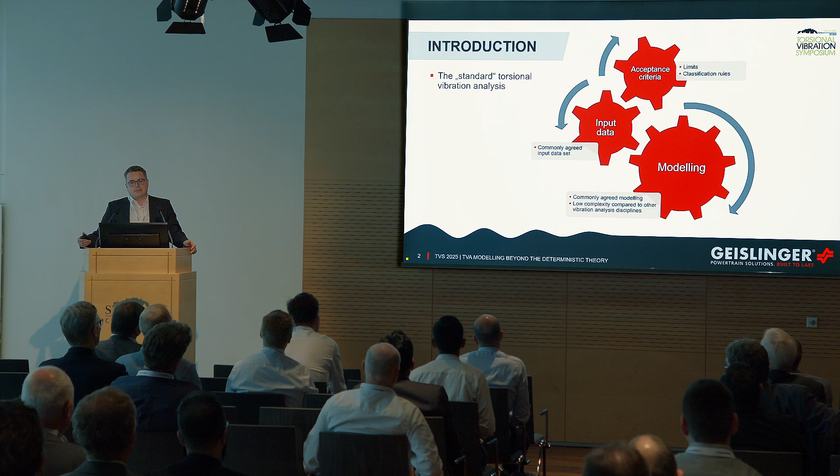symposium. And from my point of view, torsional vibration analysis plays such a crucial role in vibration analysis and vibration engineering, as it has the main pillar of a concrete and commonly agreed modeling that can be verified by measurements. We all are players in this field because we can exchange input data without having fear about IP protection. And there are acceptance criteria. We have clear go and no-go areas.

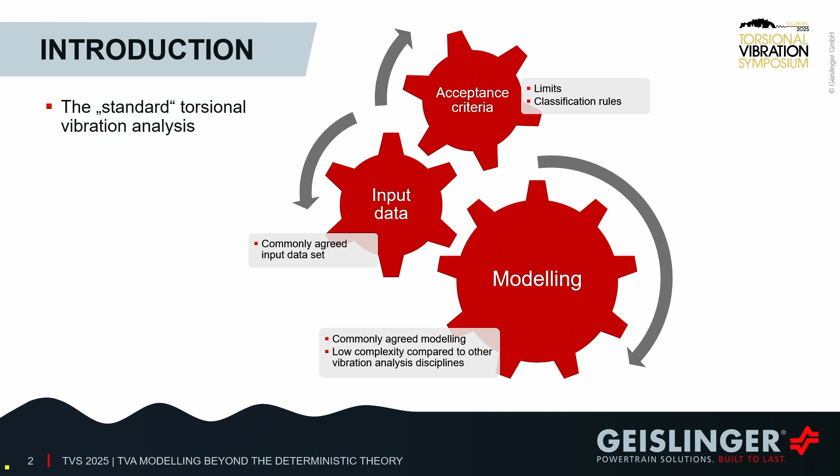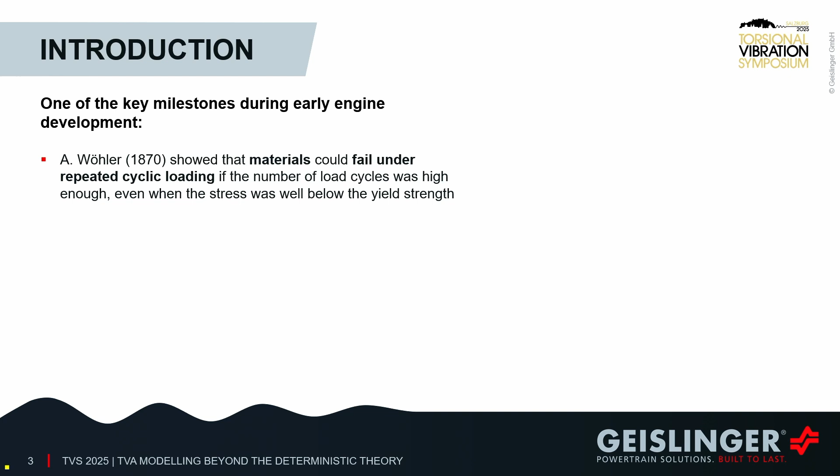And exactly this last one, I want to emphasize a little bit more to give the link to the non-deterministic theory. So talking about acceptance criteria, one of the first key milestones was when it was found out by August Wöhler that materials could fail under repeated cyclic loading. The stress levels were below the yield strength, but the number of cycles was high enough that they failed. And by major contributions from other very famous guys in this field, Miner, Palmgren, Cadwell, Weibull, they developed a theory that allows us today to decide go or no go.

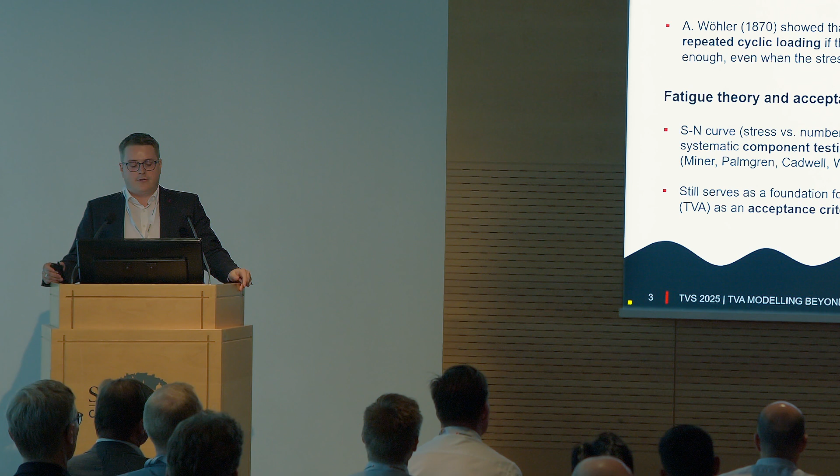And how do they do this? They were doing intensive testing, took the results, did statistical evaluations, and derived acceptance criteria based on this. So whenever we are doing torsional vibration analysis, and whenever we are saying something has to be good enough, we are doing somehow a simplification based on statistics. And this is the way I wanted to go.

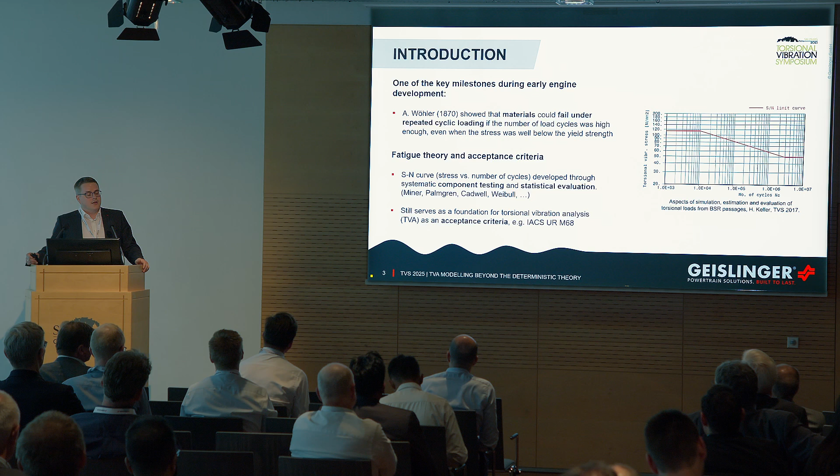But if we stretch this out to non-deterministic behavior, I want to give a definition or a hint of a definition of what I mean with non-deterministic in this entire talk. Everything is called non-deterministic here which is not clearly predictable. And it's always important to have the observer's view. If you are the observer and it appears to you random and unexplained, this is what I mean by non-deterministic.

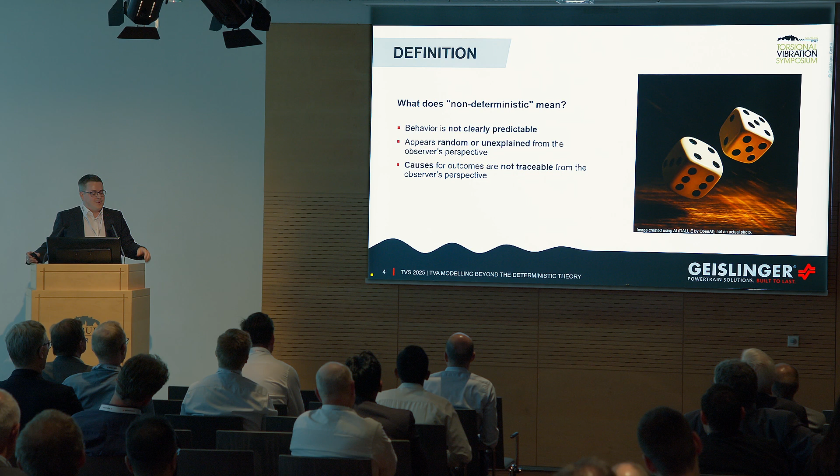And take this picture here; this was generated by AI. I just typed to ChatGPT, please give me a picture of throwing 2 dice, and you start to play with ChatGPT a little bit, and you start to gamble a little bit, and you will definitely lose some money until you notice that these dice are manipulated by ChatGPT. The left one has 2 fives if you want to continue this gamble.

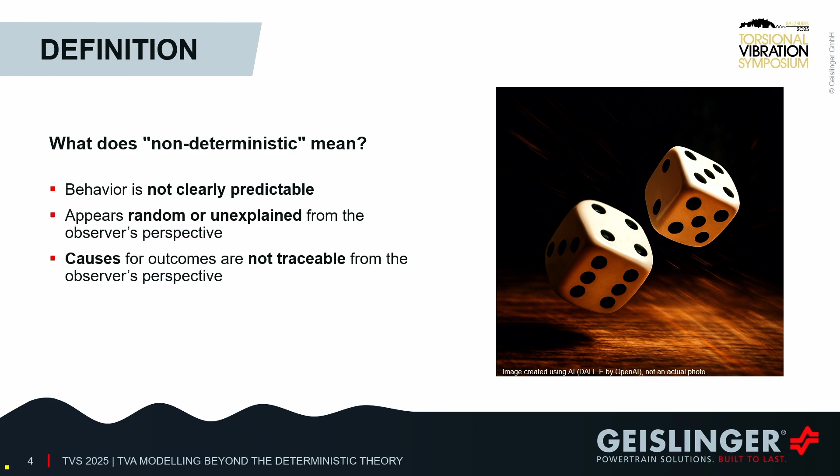So what do we take away from this? First of all, never start to gamble against AI. They're not playing fair. And second, if you don't know the real source, the outcome is surprising, and you need to work a lot to understand it. And this is what I want to show you on different time scales now.

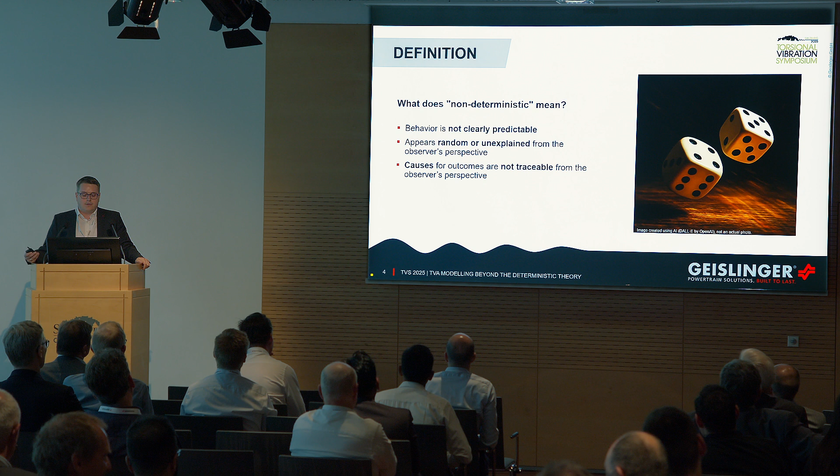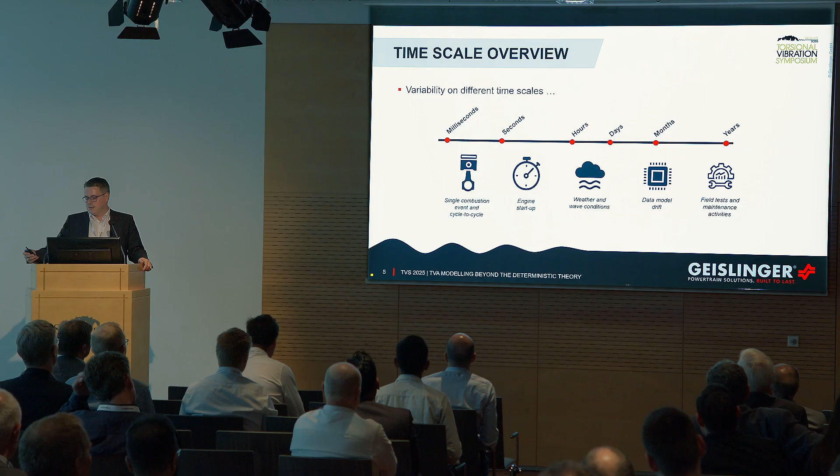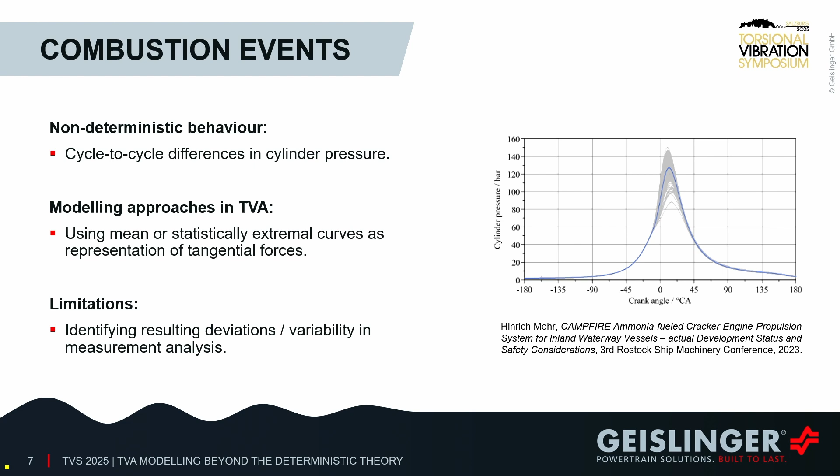We are starting on the shortest time scales, talking about milliseconds, and we're raising the time range up to the lifetime of a powertrain. Of course, we go strictly in order, and we start with the shortest one. I want to show you some results that we had on single combustion events and cycle-to-cycle comparisons during the last years. So what is the non-deterministic behavior behind combustion events? These are the cycle-to-cycle differences.

We have here a picture of a really early stage of the engine development of an ammonia engine. And we see here a clear variation in the peak pressure levels. We have here a blue line, which indicates a design curve, which is an average value. So we have to take all these measurements and make them simple and accessible for the torsional vibration analysis guys. However, how to identify those deviations in real life?

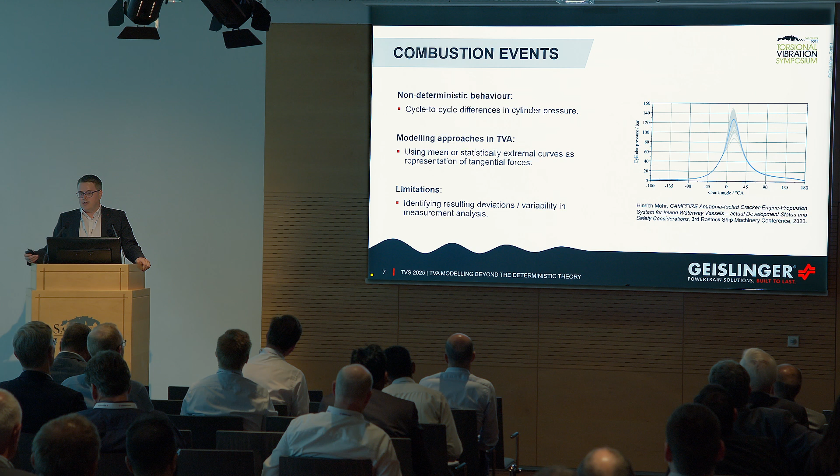And I have brought with me one really interesting example. There was, on a power plant with an 18V engine, a load test for a dual fuel engine. The first time we had operation in diesel mode, and then they switched to gas mode.

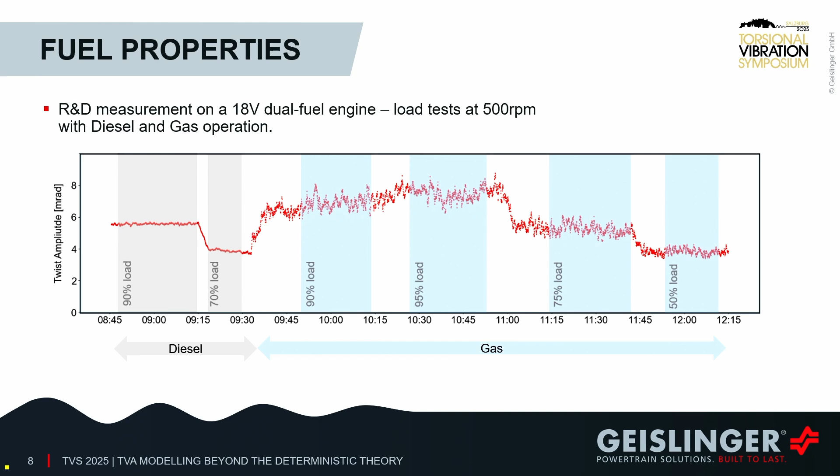And I think if you compare the two pictures, on the left-hand side we have a really stable signal, just small fluctuation. And as soon as we are switching to gas mode, we see huge fluctuation appearing. So the question is how to deal with it. Yesterday we had a very interesting talk asking if this is a storm in the teacup. I want to give another hint.

So if we work with statistics, what we see here, and we compare two load levels, one for diesel and one for gas mode, we typically only see the above picture. And this is what we represent as measurement analysis result typically. So mean values comparison, and we compare this with what the torsional vibration analysis said. But we sometimes neglect the below picture.

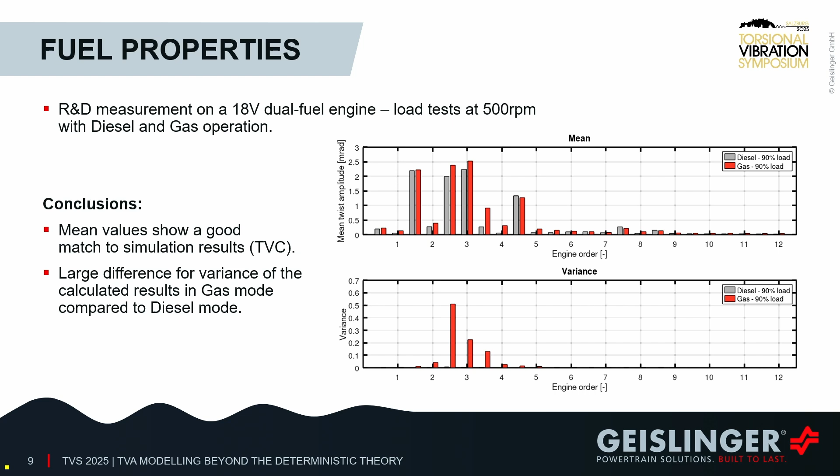So we see here the variance of the different harmonic orders, and they are many orders of magnitude higher in gas mode than under diesel mode. And if you're not taking this into account in your considerations, this might be at first sight a storm in a teacup, but in other places where you have to do a fatigue model or a damage model, it might be surprising to you that something might fail in future.

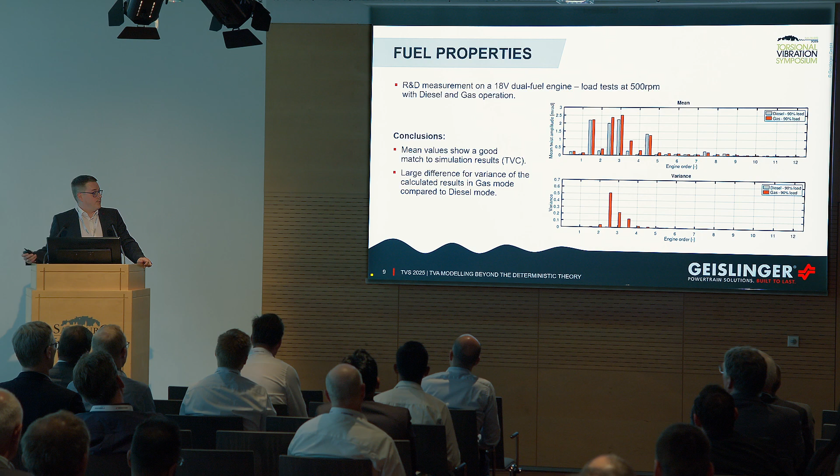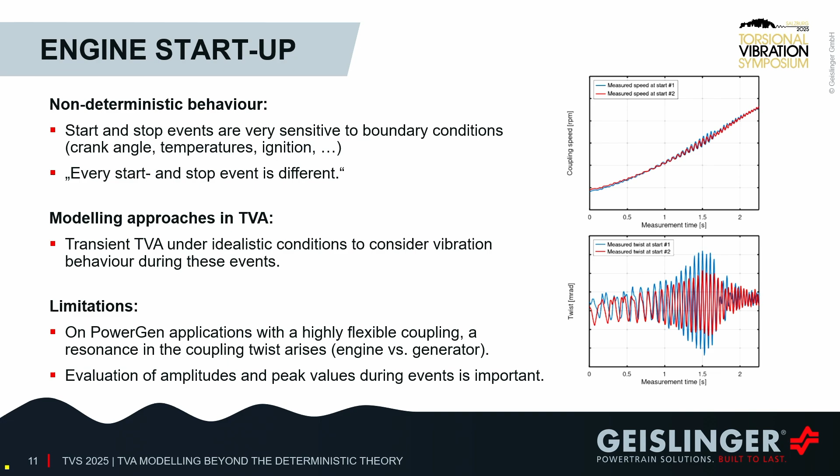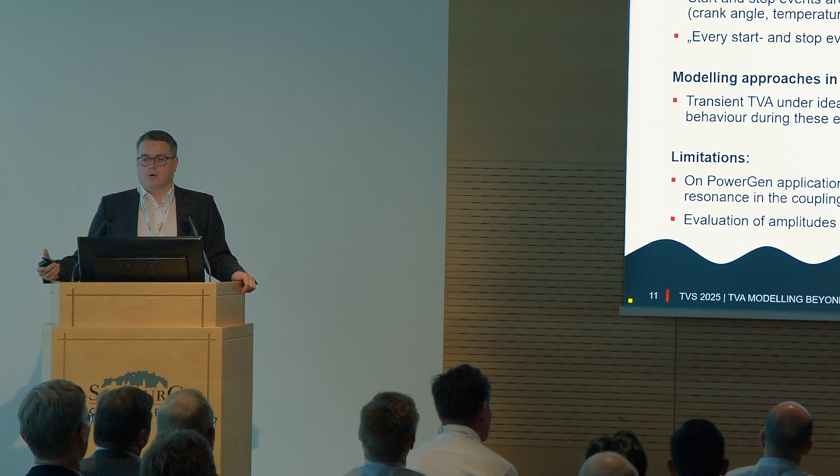And this example comes from a power generation set where the engine is coupled via flexible coupling with a huge generator. And during the engine start event, we are having an engine versus generator resonance peak that needs to be passed anyway when you want to go to your idle speed. And we see here two starts, one in blue, one in red. One having high amplitudes, one having low amplitudes, both having the same acceleration rates. So the question is how to deal with this in simulations.

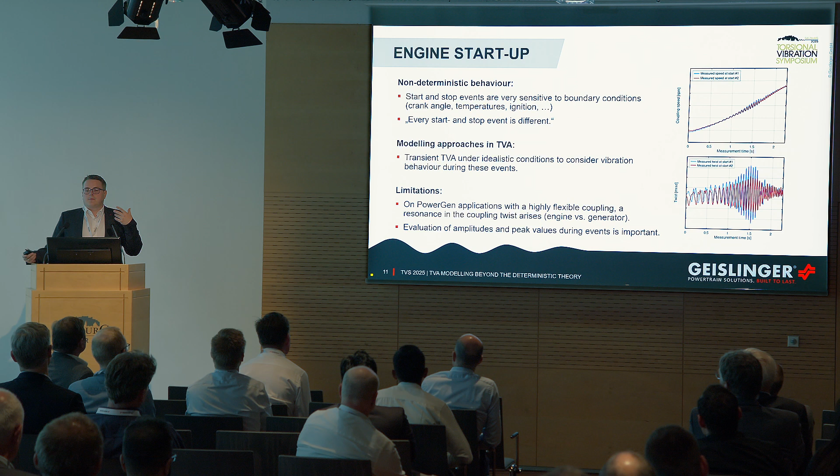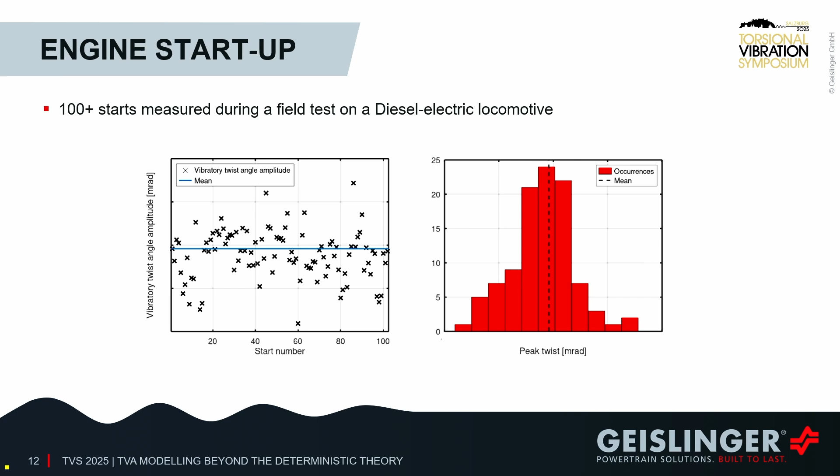So we do transient TVAs, assuming idealistic conditions. We assume that we exactly know where the combustion process starts and where it goes, and we end up with somehow a representation. However, if I show you now over 100 different starts, and we want to evaluate the peak loads of these resonances, we now see here a picture. Every start is different. And if you're only considering the average level, you might not catch the full picture, as peak levels might be much higher or much lower. And in this perspective, if you collect them all and put them in a nonlinear damage model, your results might become inaccurate, either too dangerous or on the safe side.

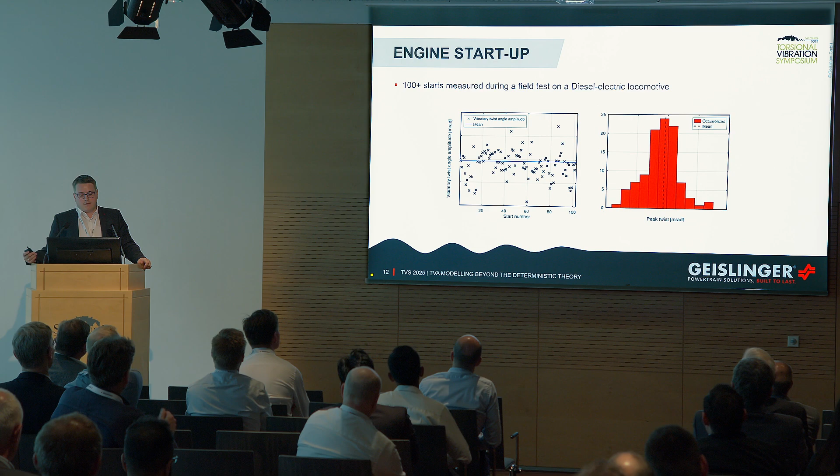If we expand our journey now to hours and days, we talk about weather. Weather is a good small talk theme and also a good topic for ending such a symposium like today. And I have to admit here, environmental conditions are not entirely predictable. We have equations behind this where small measurement errors imply chaotic behavior at some pace. So it's not purely stochastic, but it's not deterministic in the way that we commonly agree about it.

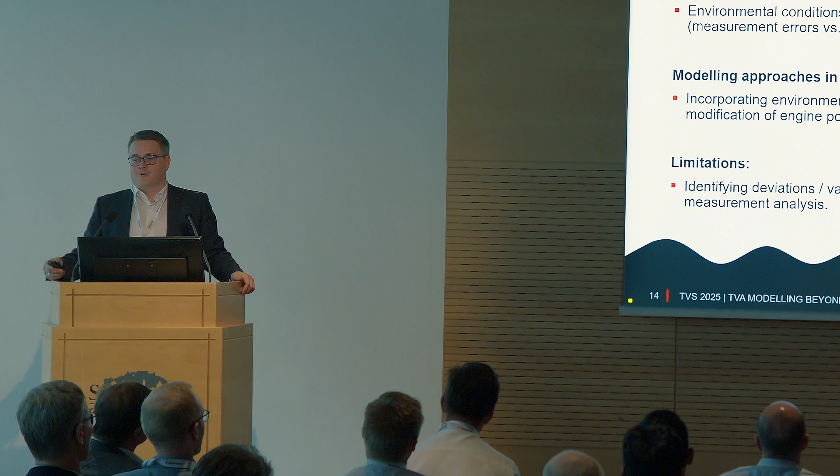Let's take this from the other side. So if weather influences torsional vibrations, why not use torsional vibrations to say what the weather condition was? And this is exactly what we did. So we started to train a model just based on data from the monitoring system of a torsional vibration damper. We had a third-party platform that provided us all the information that we needed: wind speed, direction, GPS data of the vessel. And then we just started to train the model.

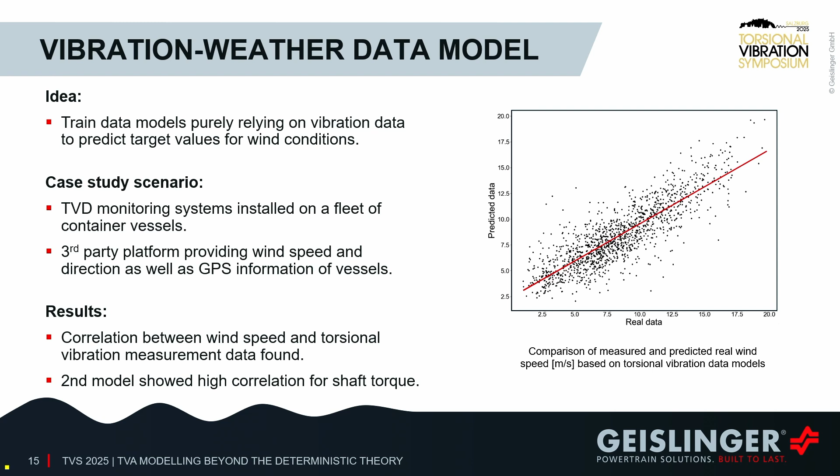And in the end, we came up with very interesting results. So thinking about an engine room device predicting wind speed and wind direction, we came up with a very interesting result that there's a strong correlation between these two. And we have here a picture where on the x-axis is the real data, and the y-axis is the data we predicted based on the torsional vibration measurements. If it were on the red line, it would be perfect. However, we were surprised that you can even do this on this kind of level.

We did this also for fuel consumption and shaft torque, which are more naturally compatible with torsional vibration, which resulted in much better results here. But I wanted to show this other consideration by this modeling.

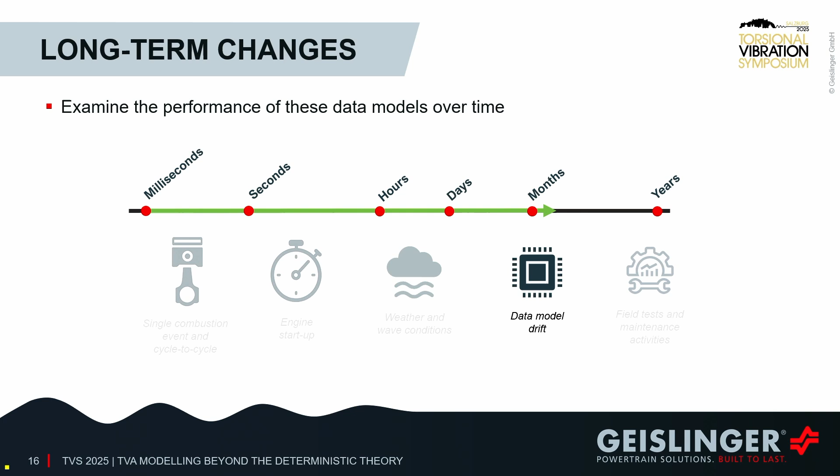Talking about exceeding the deterministic theory, I want to bring up data modeling, of course. We have seen here one model, and I want to take the same vessel's shaft torque model and consider how it evolves after time. And for this, we have a container vessel, and we looked on what kind of changes might affect such a data model that the prediction quality falls and falls and falls. And there are two possibilities. First are sudden changes, and others are long-term changes, such as wear and fouling.

And then something completely unexpected happened. This vessel was always operating between East China and Rotterdam, for instance. And now they changed the route. And with the change of this route, this was somehow a sudden change. Also, the quality of the prediction went down and down and down. So we could not achieve the same operation. For us, this was not expected, so it was not deterministic. For the ship owner, of course, this was expected. He has planned this long before, and therefore the observer's view is again important.

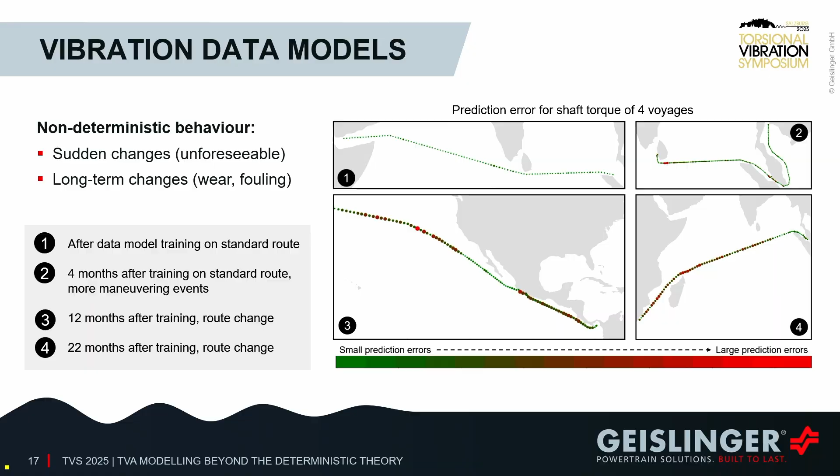And finally, after 22 months, the model was checked again, and we can see here that in the areas where we had the training data, we had a good prediction error. However, the final route was towards South Africa, where the prediction error increased noticeably, meaning such models are not always valid. They have to be retrained based on the data that you have available on a constant way.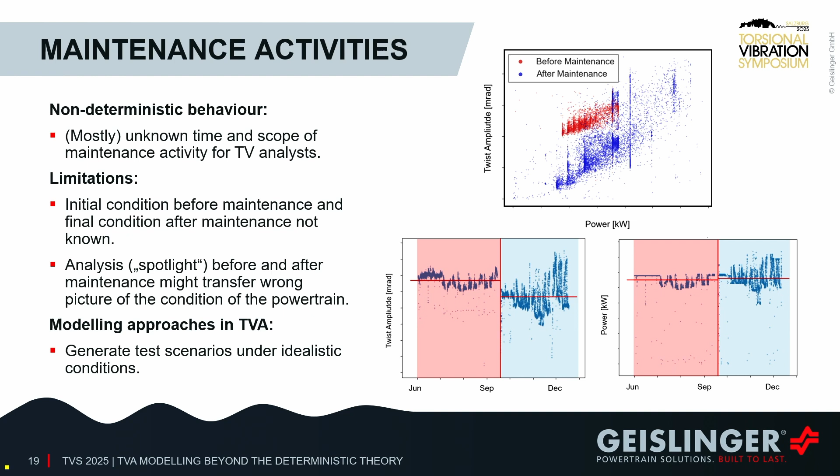And what we identified in this way was the twist profile, as it's shown upwards and also on the left-hand side downwards, changed completely. And think about if you're doing a torsional vibration analysis before an event and after an event, and you see something like this. You won't be able to really deduce the correct stage, or you make misleading recommendations. So we see here a stable twist profile of the TVD damper, and afterwards large variation.

And therefore, it's always important to have the knowledge of something like a maintenance activity or other changes on the system, might be also a retrofit solution, in order to avoid such spotlights that leave you unclear about the correct condition. And of course, torsional vibration is strongly correlated with power, so you also have to know about the power output, otherwise you're blind towards the real deal that you have to do.

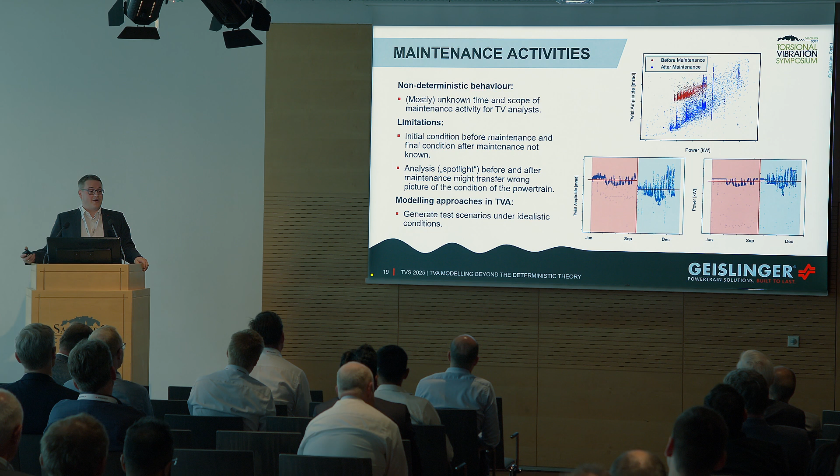And this is where I think torsional vibration analysis comes nowadays to its boundaries. So we have here limitations to really correctly deduce from spotlight measurements the correct behavior for such applications. And from my perspective, this can only be done by historic data collection, data modeling, and as data is arising, machine learning and artificial intelligence.

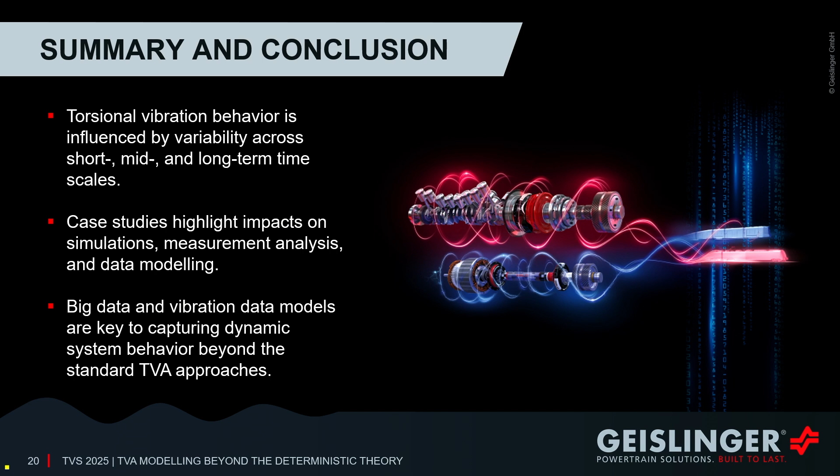So, what we heard today, torsional vibration behavior is influenced by variability across many timescales. We found 5 case studies that I wanted to highlight to you, which I leave as a question to you, how to incorporate them in simulations, measurement analysis, or in data modeling. And somehow you reach at a certain point the boundaries of torsional vibration analysis. And from our perspective, capturing these dynamic behaviors by using data modeling and advanced data techniques might be one way to go. And I would be happy if in 3 years we will talk again about this topic in more detail.